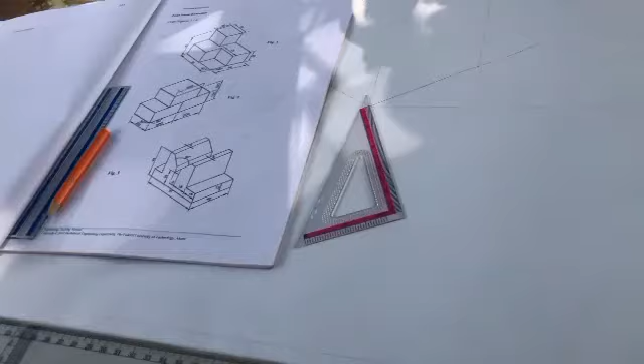We are trying to copy figure 3. So this is how you will start. You will see that this is having a horizontal line. So from here, we have to draw a horizontal line, which I've done here.

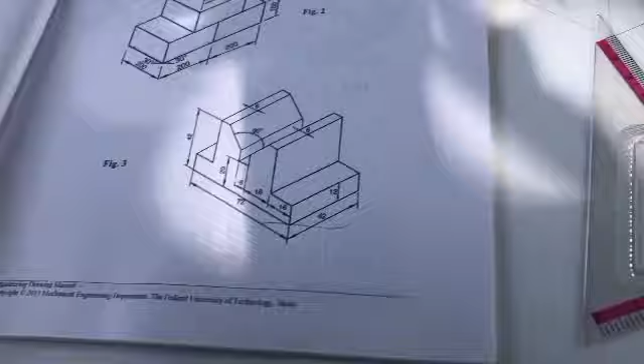So I have to make 4 cardinal points so that this can go up. Just see the way I'm doing it. Look at the way I'm doing that. No problem, just come back to the image.

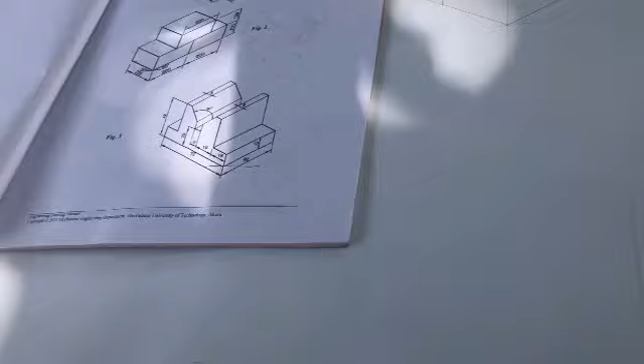So I need to draw a line like this. Just make sure, just take note that you're always making use of the 30 by 60 set square, and you're using the 30-degree side of the set square for everything you will do here. It is the 30-degree side you will use. So now I've been able to make this.

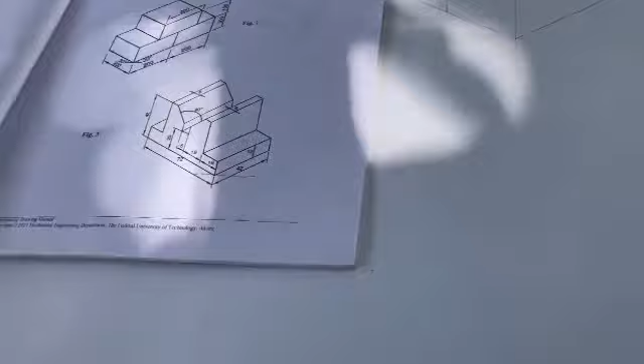Then I'll measure what? From here to here, it is 1.2. That's 12, you measure 1.2. So I can still measure 1.2 here, but I need to get the distance of this, which is 4.2. So you measure 4.2.

So you use the 30-degree side, like I said, you make use of the 30-degree side. Then 90-degree, so that it can come like this. You use 90-degree so that it can come like that.

I'm sure we can all do this. The issue we'll just be having is how to get this 90-degree. So that is actually where we are going to. But let me just take my time to explain this part.

You see that I'm always using the 60-degree side, the 30-degree side of the set square. So take note too, kindly take note. I'm always using the 30-degree side, trying to join everything at the same time. As I'm joining, I'm noting my point. So this one I can choose to draw like this, and I can choose not to draw like that.

It depends on you. So from here to here is 1.6. So when I measure 1.6 here, all I need to do is to transfer it to the other side. 1.6, then I transfer to the other side.

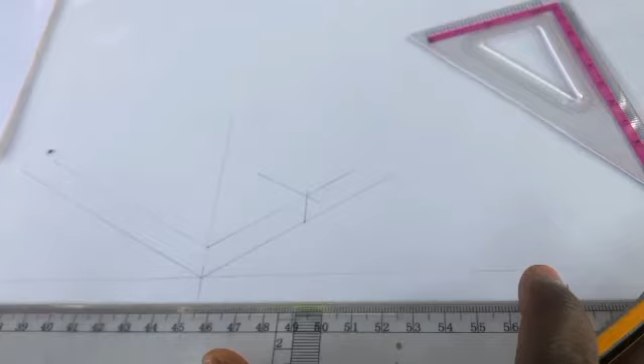So there, I need to project this one up. That is why it is called projection. Isometric projection, meaning they are trying to project what you are seeing.

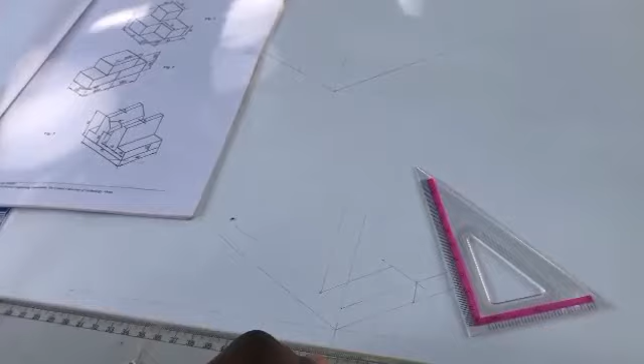No space. Okay, so from there we'll continue. I can choose to finish up this one before proceeding to the next one, and I can choose to continue from the next one. So the choice is yours. So let me just continue. Let me finish up this one.

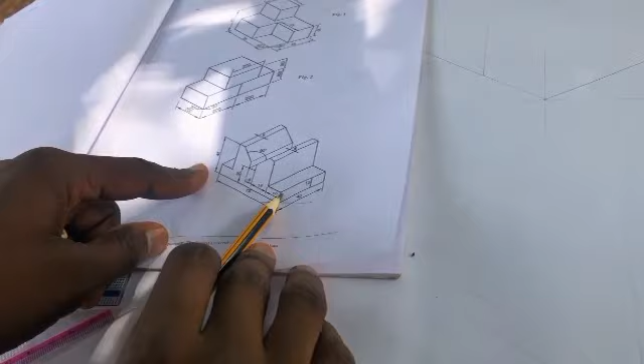What is the distance from here to here? From here to here, we don't know, but we should actually know, because from here to this edge is 42, and we've already taken 12 from here, which means the remaining part will be what? 30. Do you understand? So 30.

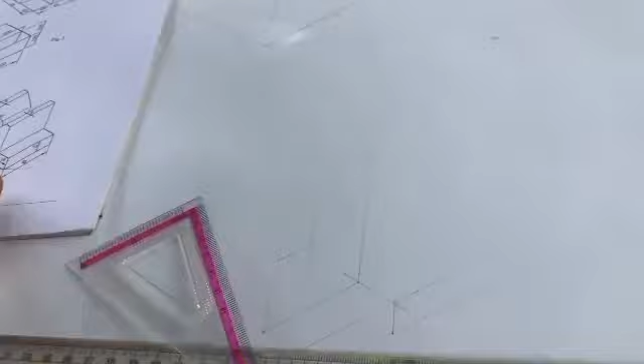So from there, let's just project something like this, of this format. Let's make it like this, then like this. So we are going there.

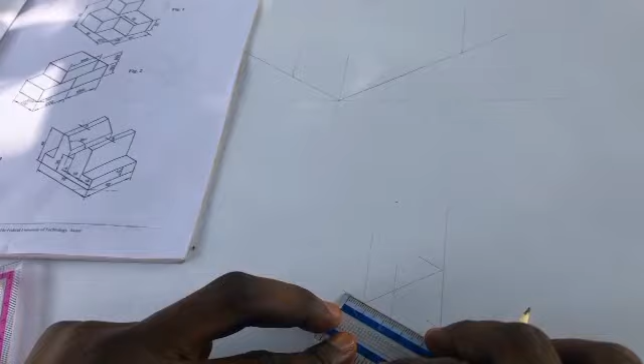We are getting there. So distance from here to here is 6. From here to here is 6. So you measure 6. As for me, if I don't want to measure, I can still get an accurate result. I can still get an accurate result. But just to be on the safer side, I'm just measuring.

Because I can tell you, I already know the length of all these things. That is because I've been practicing. So MEE is not just mechanical drawing, it means making extra effort. So let's continue.

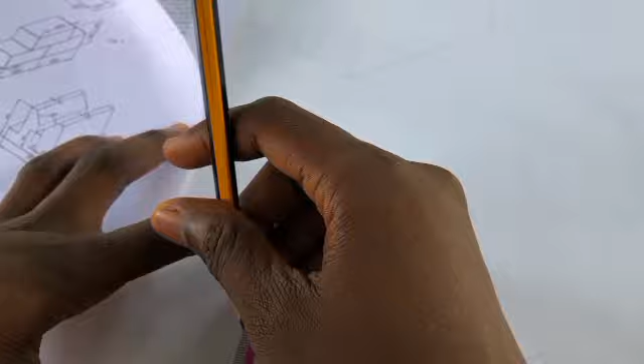What's it? So you measure 7.2, which I've done here. So 7.2, I need to project it up. There's no need for me to measure 1.2 because I've already extended the one of this towards this side. So from there, I just need to balance everything up like this.

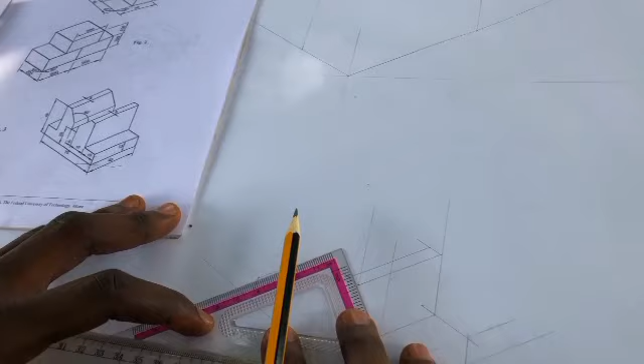So now, this does not really have an accurate length. It's just like something is going inside. So as I've done like this, I need to make this one come inside. How do I do that? I need to change the 30-degree side like this.

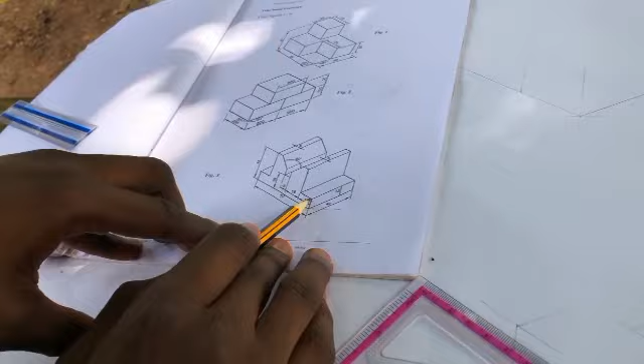So once I change it, you see, it's already here. So what do I need to do? I need to check what is the length from here to here. And the length from here to here is the same as the length from here to here, which is 16. So this one too will be 16. To be on the safer side, always write the length.

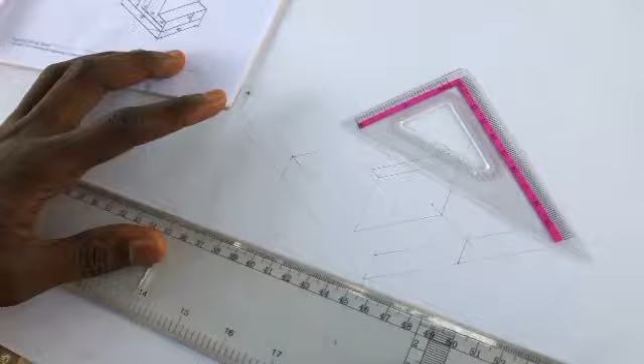The paper is yours, you can do anything you like on it. Do you understand? So that you will not get confused. So you measure 1.6. When you measure 1.6, you trace it up, you make it go up again. That is why the orthographic of this thing - is it orthographic?

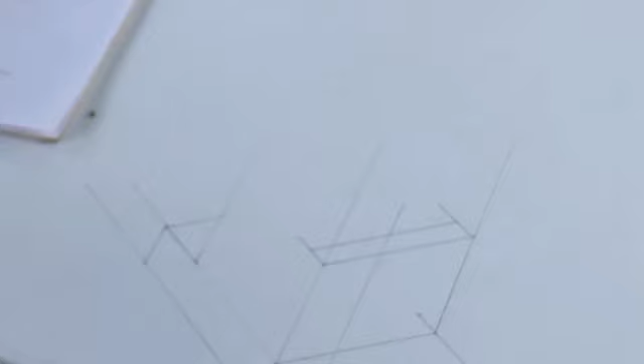Yes. The front view, side view, and the likes is very simple. So now, what should we measure here? We already know that from here to here is 42, and we've taken 1.2 already. So the main one is 30, just like this one. So you measure 30.

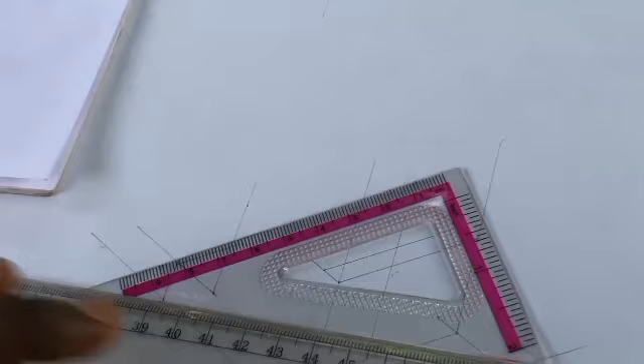So after measuring 30, you do it the same way we've done the other one. So sorry, we are making use of a short set square. It's because the materials are not complete here, so we have to just - and you know, we are not yet in school, we are just trying to make us learn while we are at home. So at least you have a view of what you are coming to.

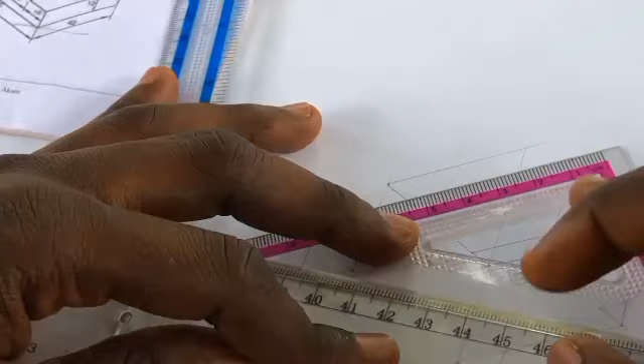I said something the other time that I don't need to measure before I know that I've gotten 6. Now let me prove myself. I will tell you this is 6. So I don't need to measure before I know that this is 6. So let's check if I'm actually accurate.

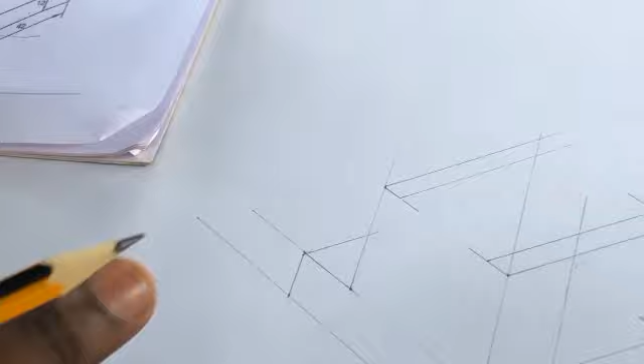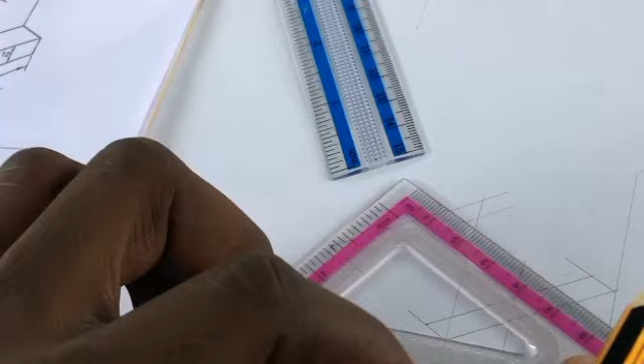Okay, this is 0.55 if I'm not mistaken. So let's just continue. From there, you see, we're almost done. So let's just close it up. Let's close from here to here, which is 42, Abby. So I can choose to close it up by measuring 42, and I think I can use this one to close it up too. So let's just use this one to close it up.

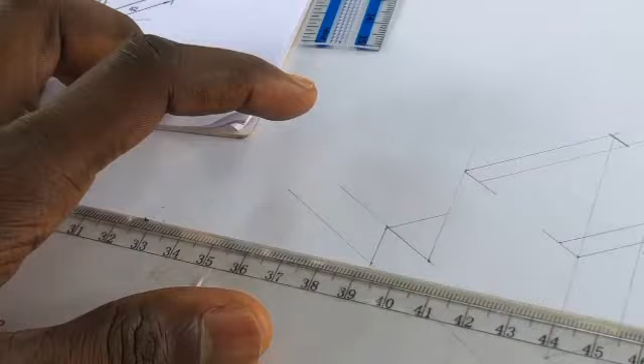Do you understand? So your thickness, you can do it later. So from there, let's bring down this, let's bring down this, let's check it out. This is actually where students make mistakes, and the reason is not because maybe they don't know it, but because they've not gotten how to go about it.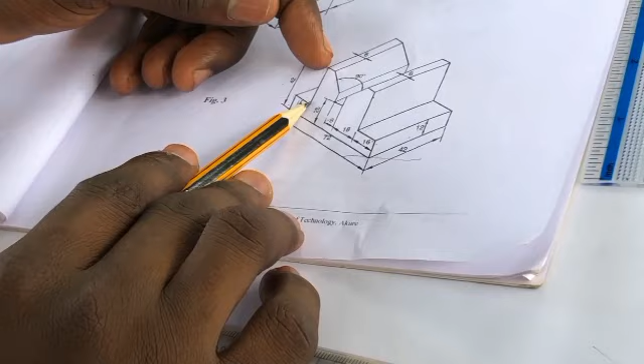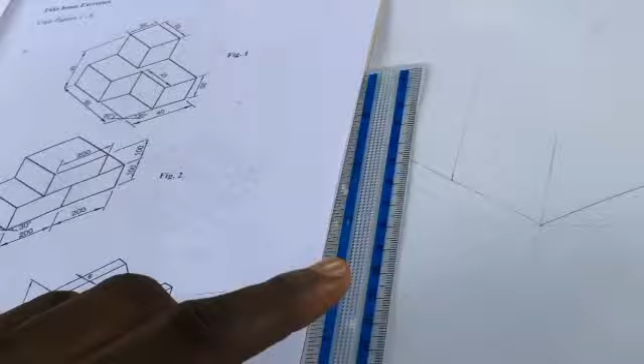Now we have something like this. Look at this part, you see this part? This is 30. But from here to here, from here to here, they said is what? 20. Look at it very well. From here to here is 20. Which means a line is starting from here, and you measure it as 20.

So now let me measure from this down, up, 20. If I measure like this, I have not gotten an accurate result. You know why? Because the ruler might be bending or might be like this. So I don't need to stress myself. This is what I need to do.

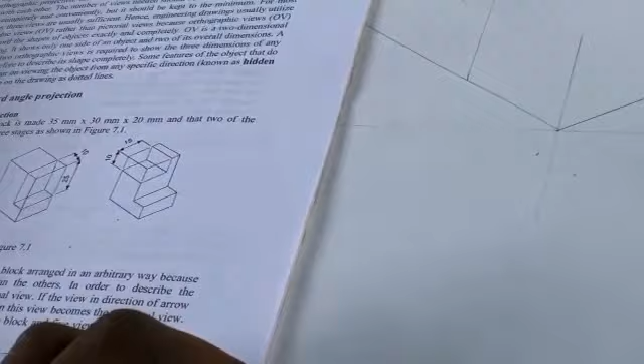Since I know everything is 20, and I have gotten 1.2 already from here, which means from here to here is 1.2, it means I have 0.8 left. You understand? To make it 20. So let's go from here, measure 0.8. That is on this side, we'll measure 0.8. Sorry, the video is kind of getting longer.

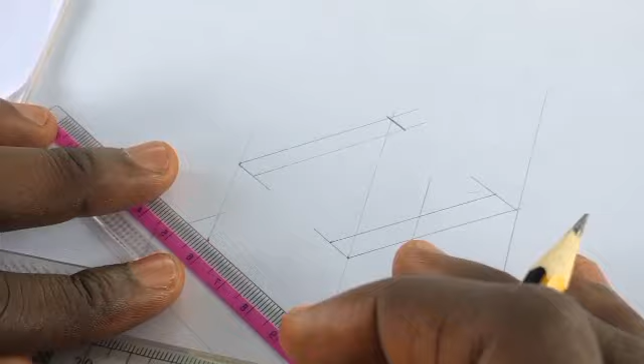It's not meant to be. Anyways, just take your time so that you can understand, so that I can understand it better. So from there, you will see that I've been able to get an accurate way of going about it. So after I get that 8, I've gotten the 20.

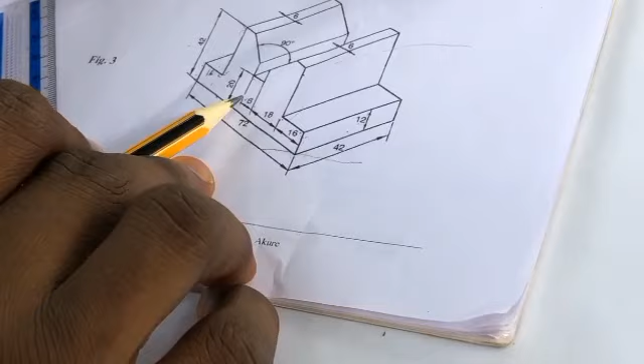So after getting the 20, look at, from here to here is 16. Then from here to here is 18. Then from here to here is 6, which means from here to here, the length is 18 plus 6. You will not count this one again because we already have it here. So let's count: 18 plus 6 is 24. So which means where this one is actually meeting this point, you measure 18 and 6.

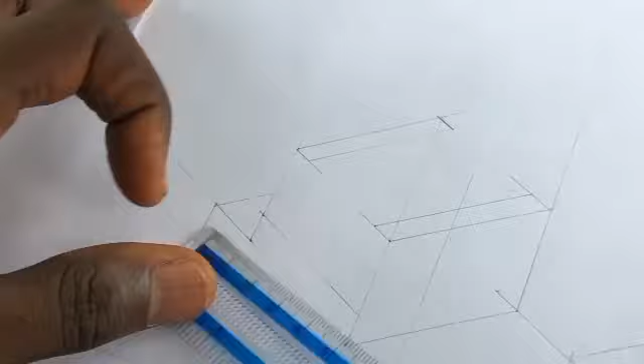And where is 18? This is 18 and this is 6. I don't know if you are getting me. I think you are following.

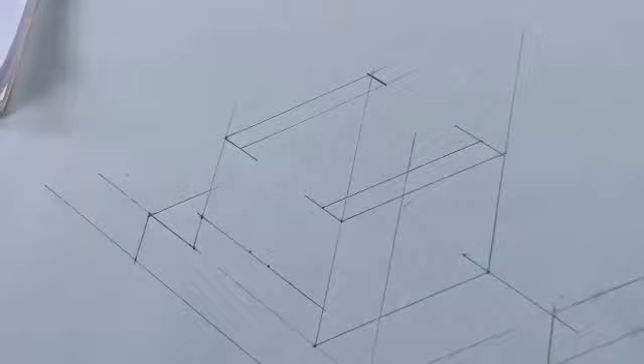So from there, we need to finish up something. We need to project them up. You see that I'm still making use of the 30-degree side and this 90-degree side. I'm not even touching this. So I think you understand now.

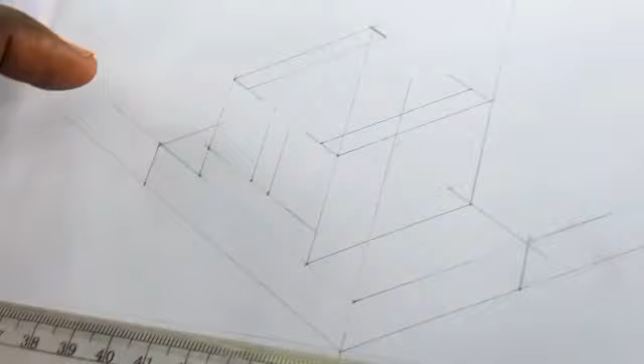So this one is coming inside. That one will now be touching this one. Let's see. If you've done the right thing, you should actually touch. If you've done the right thing, like I said, you should actually touch. Okay.

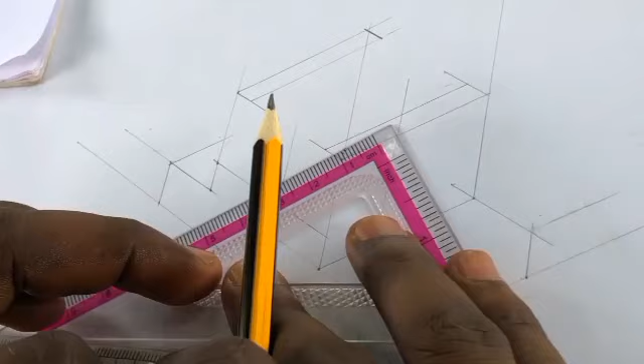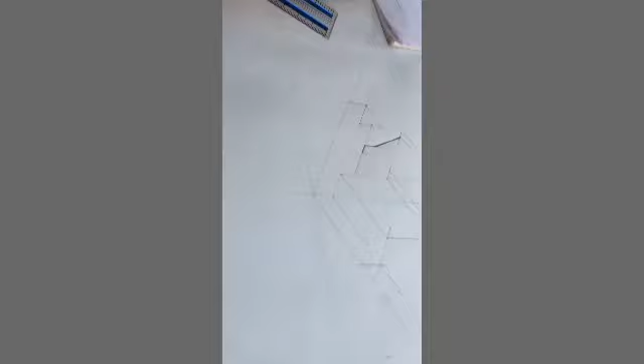Pause it. So you measure 7.2, which I have done here. So 7.2, I need to project it up. There's no need for me to measure 1.2 since we have 6 here, which means this one and this one should be 6. So I've measured 6 and I already projected it here.

Let me measure 6 here as well. When I measure 6, all I need to do is join the point towards this. You can just use your hand like this. I think you understand. So I'm trying to make my work thick.

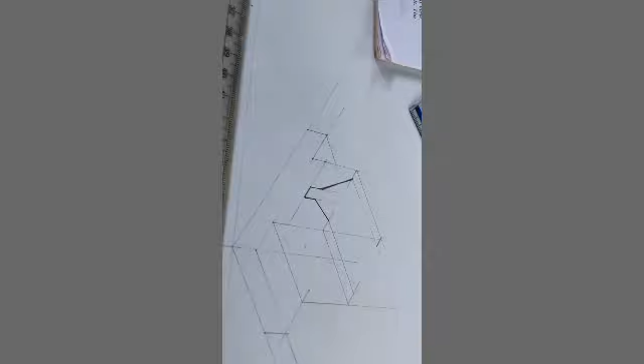So from there, let's just do the finishing. This one can just come in. You see the way it's coming in, as if it is not even needed. So we are almost finishing up our work.

Since we've gotten 6 here, you just extend it up. And how do you do that? You use the 30-degree side of it, which is this part. You see that the one we are doing is not like the one you've seen there.

So what is the next thing? You measure 4.2, so this one too will be 4.2. I don't know if you people understand, but I'm sure if you repeat the video over and over again, you will understand it much better.

So from there, don't say let me use it like this. No, you still have to perfect it, and make use of the 90-degree side.

Sorry, the work is rough. Like I said, we are not yet in school. We are just trying to make sure.

So you just need to join this one to the appropriate part. Then we are good to go. So just the next thing is to finish up. Make your work thick.

Stop. Don't try to thick or thicken your work along the line while still drawing. Make sure you are done with everything before you start to make it thick, because if you start while still working, your work will become so much dirty. Even now, the pencil I'm using is not that good. Make sure you don't sharpen your pencil with a sharpener.

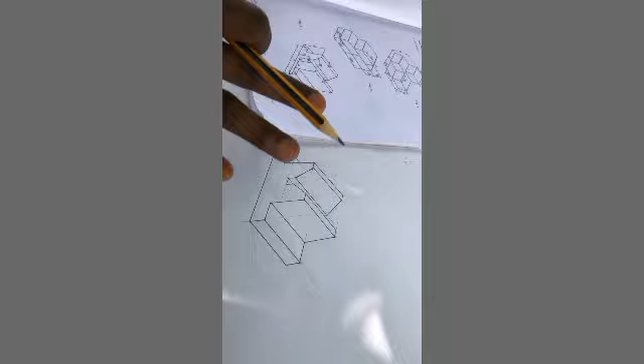Pause that, stop it. So here is the finishing of this particular drawing. Can you see that it's almost accurate, but we are having some double lines here, which means the work is not accurate. If I'm to be your teacher, I'll be marking this maybe 7 out of 10, because...

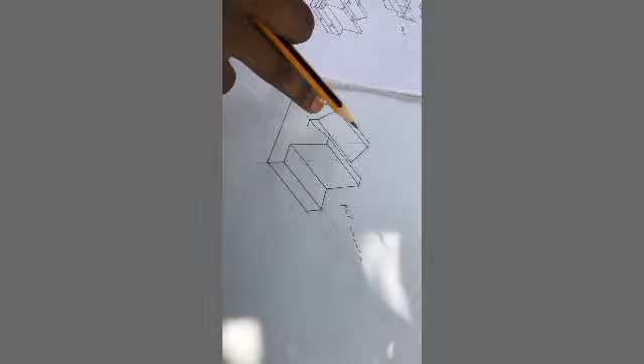I can see some stains, and your pencil work is kind of very visible. It's like they are still affecting the drawing. So make sure the pencil you'll be using is more sharpened, not like this. Don't sharpen it with a sharpener, make use of a blade.

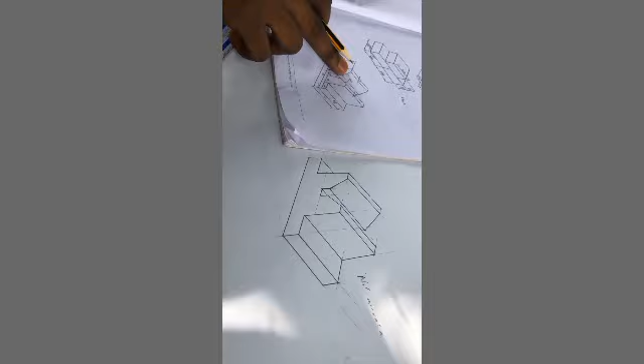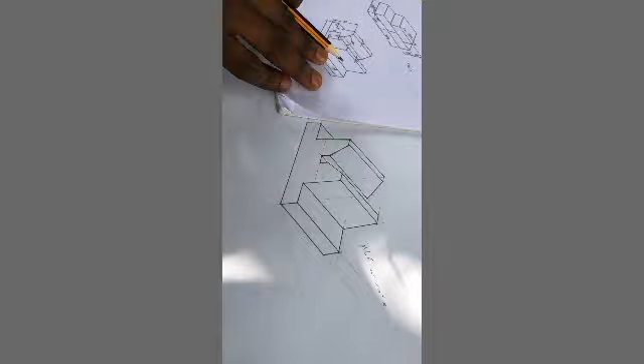So can you see that we are able to project it? This angle is just trying to tell you that this one and this one should form 90 degrees, but that is not actually what you are focusing on. It is for you to get a perfect way on how to go about it. So this is the perfect way on how to go about it.

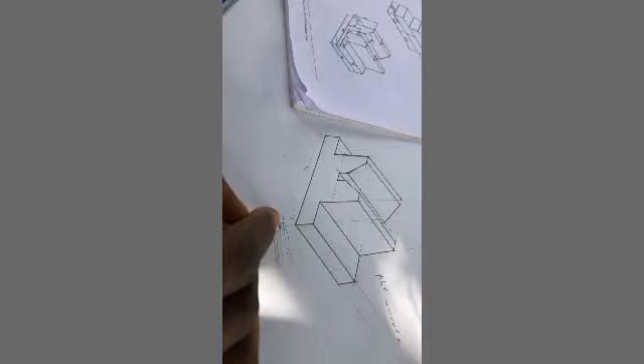So don't bother yourself doing all these measurements, maybe because you want to try and impress the lecturer. Please don't try anything like that. Just project this same way, but you can try to impress them by using your lettering to say Fig 3, that is if you still have time. But if you don't have time, just put number 3. That is all, I think we are good.